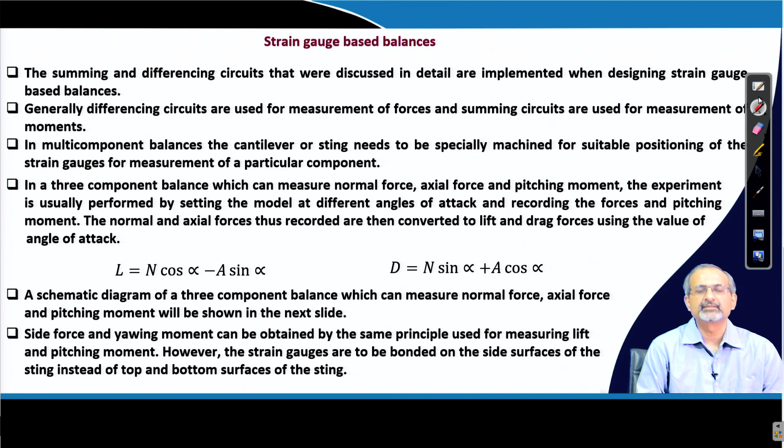We already learned quite a bit about the strain gauge based balances, in the sense that we looked at summing circuits, differencing circuits, and we also looked at how measurement of moment is better done with a summing circuit and measurement of force is better done with a differencing circuit. So keeping all that in mind, we continue discussing strain gauge based balances.

This is what I already discussed, and we move on to the third point straight away: in multi component balances, the cantilever or sting needs to be specially machined for suitable positioning of the strain gauges for measurement of a particular component. For example, if we take a 3 component balance which can measure normal force, axial force and pitching moment, the experiment is usually performed by setting the model at different angles of attack and recording the forces and the pitching moment.

So you will be getting those in the body axis system. The normal and axial forces which would then be recorded have to be converted to lift and drag forces, and for that what you need to know is the angle of attack. So once you apply the angle of attack, you can easily obtain the lift and drag forces from your normal and axial forces that you have measured.

We will of course look at a schematic diagram of a 3 component balance in the next slide. If you are interested to go for a still higher number of components in a balance, let us say you are interested further to measure side force and yawing moment, for example, then the very same principle gets extended.

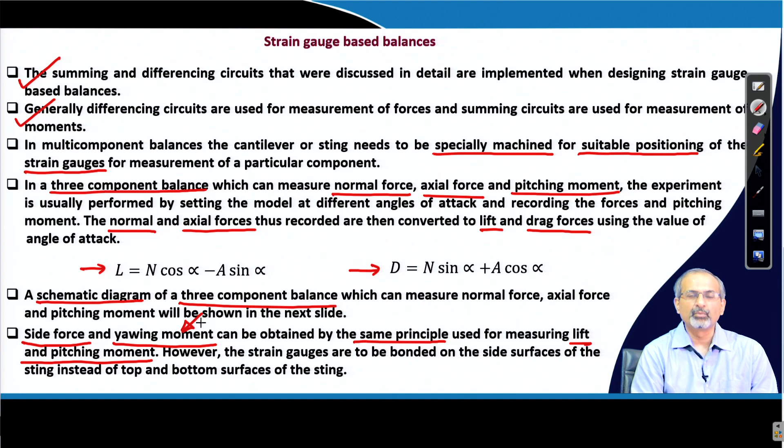Whatever principle you are using for measuring lift and pitching moment gets extended for side force and yawing moment measurement. Only thing is that the strain gauges are to be bonded on the side surfaces of the sting instead of top and bottom surfaces of the sting.

For example, if we try to draw a very simple representation this way, this is your sting which is more like a cantilever beam, though we are not showing the support here, which will be here somewhere.

Now we were talking about placing strain gauges on the top and the bottom surfaces for obtaining the lift and pitching moment, for example.

However, if you are interested in obtaining the side force and the yawing moment, you would be utilizing this side surface and the one which is opposite to it, but is not visible in this view, because that is the direction in which the sting balance will get deformed under the action of a side force and yawing moment. So we are basically changing the plane in which the deformation or the strain occurs, and therefore the mounting of the strain gauges have to be on the side surfaces instead of the top and bottom surfaces.

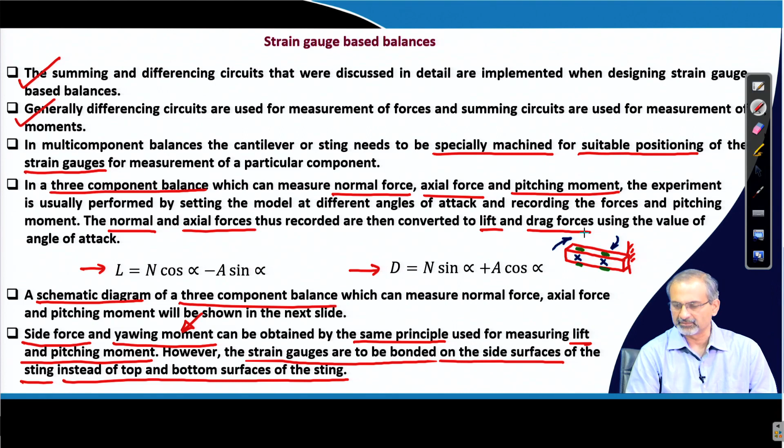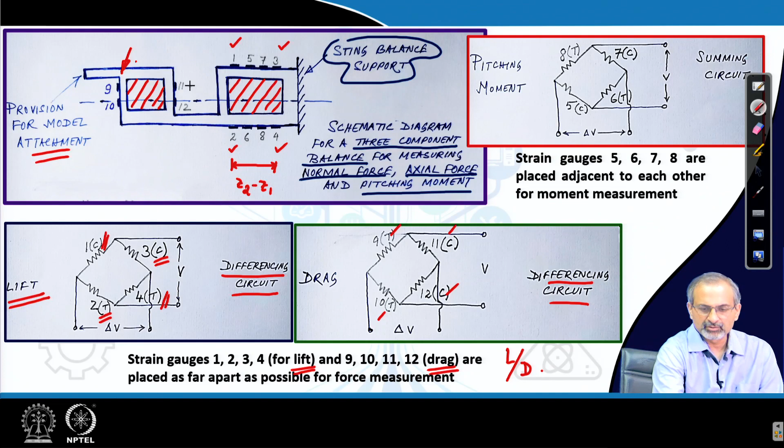And then again you apply the differencing circuit, in that case too. So you have tension, compression on opposite sides, and not only that, you also try to maximize the distance between them as far as possible.

Going to pitching moment, you have resistances 5, 6, 7, 8, which are much closer to each other compared to the differencing circuits. This is where you see the difference. They are kept much closer as far as you can approximate them, and then they are put in a summing circuit, in the sense that compression opposite to compression, tension opposite to tension, that gives you the summing circuit. And therefore...

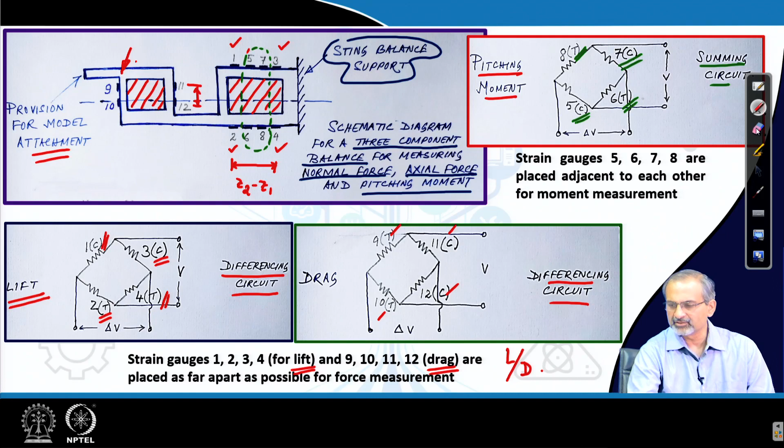You have to design appropriate sections, mount the strain gauges appropriately with appropriate distances between each other, and then connect them appropriately in Wheatstone bridge configurations, so that you are able to get either forces or moments out of them. So, this 3 component balance configuration gives us some idea in that regard.

Let us look a little further. Let us say if you are interested in measurement of rolling moment. Earlier we were talking about measurement of side force and yawing moment, and we found that it was somewhat similar to measurement of lift and pitching moment. Only thing is, mounting of the strain gauges have to be on side surfaces instead of top and bottom surfaces. But what about rolling moment?

Here the section is usually differently designed. Let us imagine that the main sting body is circular. If it is that way, then it is machined in a form like this in one part of it, where the strain gauges related to the rolling moment measurement are to be bonded onto the sting balance surface. So, we find that some kind of a section like this is machined, and on the 4 surfaces, 4 strain gauges are mounted. Remember that when there is a rolling moment, it will tend to move like this or like this, and a section of this kind will be much better sensitive in trying to record the rolling moment. Therefore, the sections have to be appropriately designed to make them sensitive for measurement of a particular force or a particular moment. This gives us a good example of that.

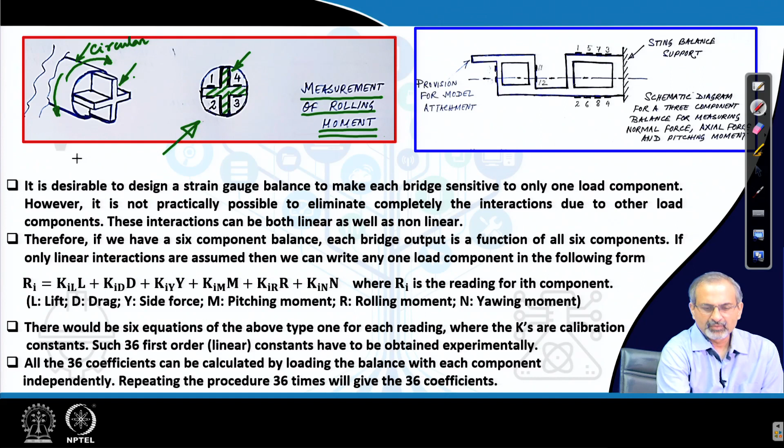Beyond all this, there is also the problem of cross coupling between the different load components or interactions. So, what is meant by that? Let us try to discuss that.

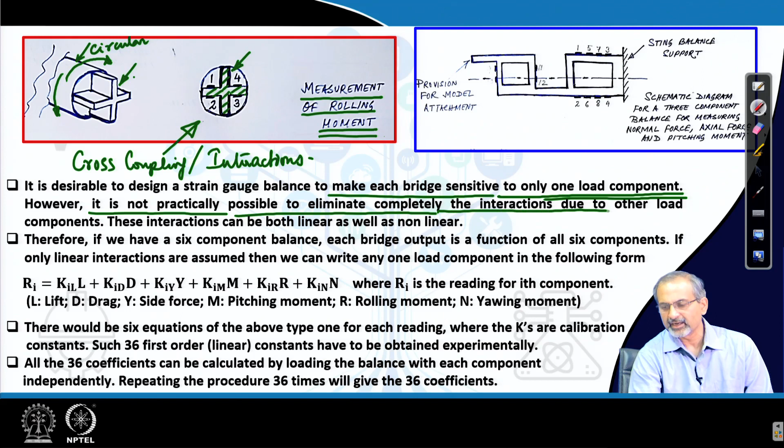It is desirable to design a strain gauge balance to make each bridge sensitive to only one load component. Let us say the bridge which is measuring the normal force only measures normal force, it does not respond to any other force application. However, it is not practically possible to eliminate completely the interactions due to other load components. This is a fact of life, and these interactions can be both linear as well as non-linear. Modeling them as linear is somewhat easier, modeling them as non-linear interactions is further more complicated. But again, the real world most often shows up non-linear behavior to quite an extent.

Therefore, the different loadings tend to get coupled when it comes to the measurements. This we have discussed to some extent when we were also talking about mechanical balance, if you recall from an earlier lecture.

Well, then in the present context of electronic balance, if you have a 6 component balance, each bridge output is a function of all 6 components, 3 forces and 3 moments. Let us for simplicity consider only linear interactions. If we do so, then we can write any one load component in the following form. We have shown a formula here for indicating the way we should represent it. This is the formula.

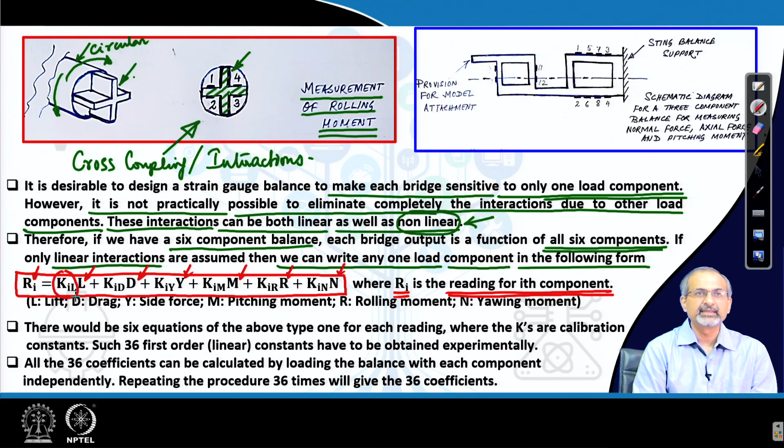What do those terms mean? First of all, Ri is basically a reading of the ith component. That ith component may be lift, drag, side force, pitching moment, rolling moment or yawing moment, any one of them. So, the different forces are written, the different moments are written, and they are accompanied by coefficients. The coefficient has an index; i is coming from this index and the other part of the index corresponds to the particular force or moment that we are referring to and associating it with. Note the nomenclature here.

If you vary i from 1 to 6, so that all the 6 components are covered, then you will actually have 6 such equations for each of the 6 readings, where what are those k's? Those k's are nothing but calibration constants.

So, 6 equations each containing 6 calibration constants makes it 36 first order or linear calibration constants, and we do not know them initially. Therefore, they have to be obtained experimentally. This is what makes life very difficult for an experimentalist, but this has to be done very systematically, without which the balance is not usable.

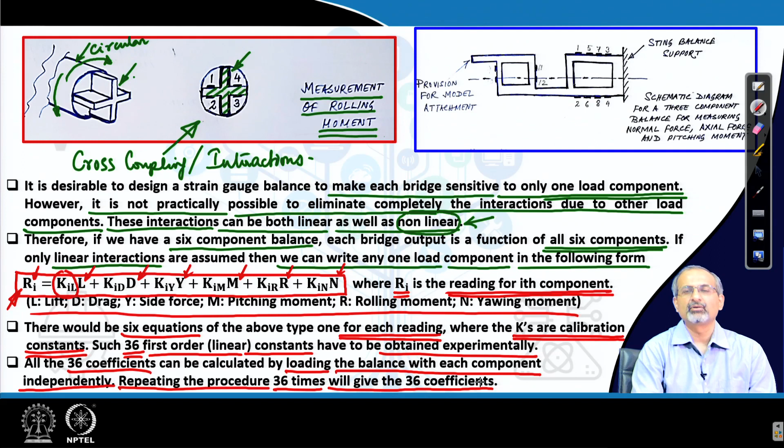So, all the 36 coefficients can be calculated by loading the balance with each component independently, and then repeating the procedure 36 times to get the 36 coefficients. There is no easy way out. You have to do it and fill up this information before the balance becomes usable. Once you are done with it, you know the values of all these coefficients, and they would be plugged in to interpret your meter reading or display reading in terms of the load that you are measuring.

So, with that we end our discussion on balances. Now, we move on to a discussion on pressure measurement using electronic systems.

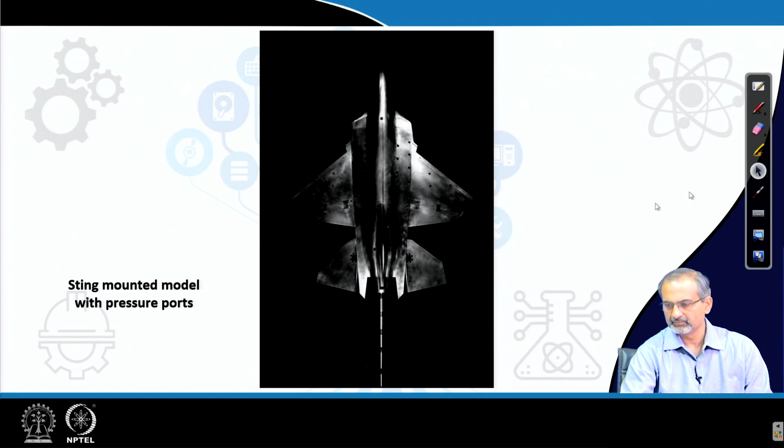Let us briefly introduce electronic pressure gauges, the main points. When we talk about electronic pressure gauges, we are basically talking about pressure transducers, and they can measure a wide range of pressures with very good response in general. We discussed how they are superior to their mechanical counterparts in terms of response time, measuring very high or very low values, and their ability to capture transients and unsteady pressure with very high frequency. These are advantages which you cannot achieve using a mechanical pressure sensing system based on pitot tubes or pressure ports coupled with manometers.

When you talk about very low or very high pressures, that means you are able to cover a wide range of pressures depending on your need, and accordingly the pressure transducer is designed for the range it is supposed to be operational for. The range that we have available is broadly 10 raised to power minus 4 to 10 raised to power 5 psi. Now, psi basically stands for pounds per square inch, and if you do the unit conversions, you will find that 1 atm is approximately equal to 14.3 psi.

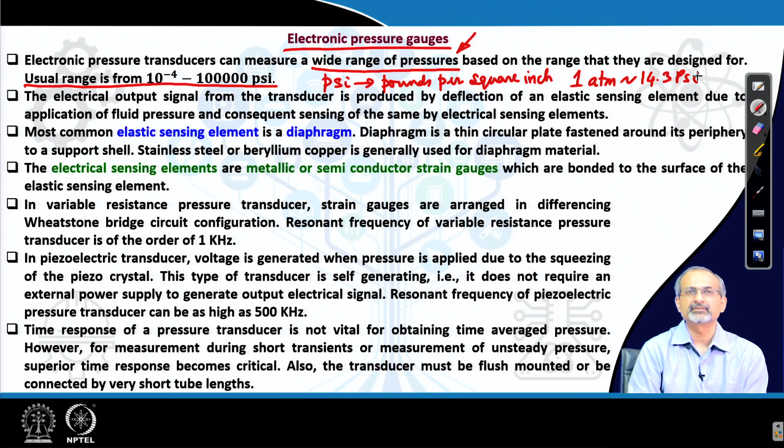So, you are encouraged to do the conversion yourself at home and check for yourselves. You are now familiar with different units of measuring pressure: bar, atm, Pascal, which is the same as Newton per meter square, pounds per square inch, etc.

The electrical output signal from the transducer is produced by deflection of an elastic sensing element due to application of fluid pressure, and consequent sensing of that deflection by an electrical sensing element or elements. That means pressure causes a deflection in an elastic sensing element, and that is converted into an electrical signal or current using electrical sensing elements. The strategy remains exactly the same as what we discussed in the case of electronic balances, but the configuration is different.

So, let us see configurationally what is the difference between what we have seen in a balance, where we used a cantilever beam like setup, which we call the sting balance, and what we are calling a pressure transducer. In pressure transducers, most often the elastic sensing element is a diaphragm. We are no longer talking about a sting or cantilever beam, but a very thin diaphragm which can respond to pressure changes. It is usually a thin circular plate fastened around its periphery to a support shell. Usually stainless steel or beryllium copper is used for the diaphragm material.

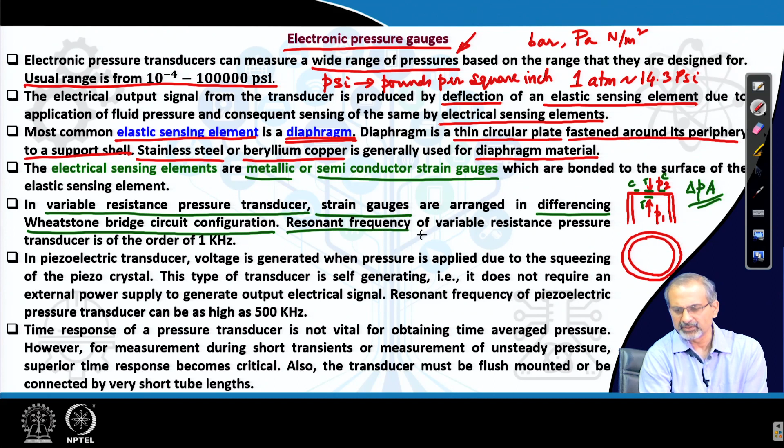The electrical sensing elements are metallic or semiconductor strain gauges as usual, which are bonded to the surface of the elastic sensing element. Variable resistance pressure transducers use strain gauges, which we already discussed, comprising differencing Wheatstone bridge circuit configurations. Their resonant frequency is of the order of 1 kilohertz.

There is another category called piezoelectric transducer, where voltage is generated when pressure is applied due to the squeezing of the piezo crystal. That means the applied pressure squeezes the crystal, and that helps generate a voltage. Therefore, these kinds of transducers are self generating, meaning you do not need an excitation voltage for them to respond and give an output voltage. They can generate their own voltage based on the applied pressure. Therefore, the output electrical signal comes on its own.

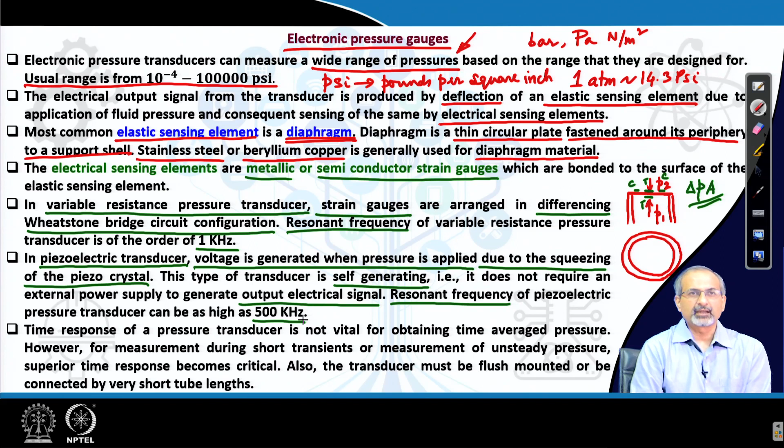They are very high in terms of resonant frequency, which can go up to 500 kilohertz or even more in the megahertz level. The time response of a pressure transducer is not vital for obtaining time average pressure. However, for measurement during short transients or measurement of unsteady pressure, superior time response is absolutely critical.

Also, when you are looking for high time response or superior time response, the transducer must be flush mounted or connected by very short tube lengths. That means, at the point where you are recording pressure, the transducer needs to be absolutely flush mounted to that point or very close to it, but certainly not at a far off point connected using a pressure tubing. That is a very faulty way of measuring time dependent pressure.

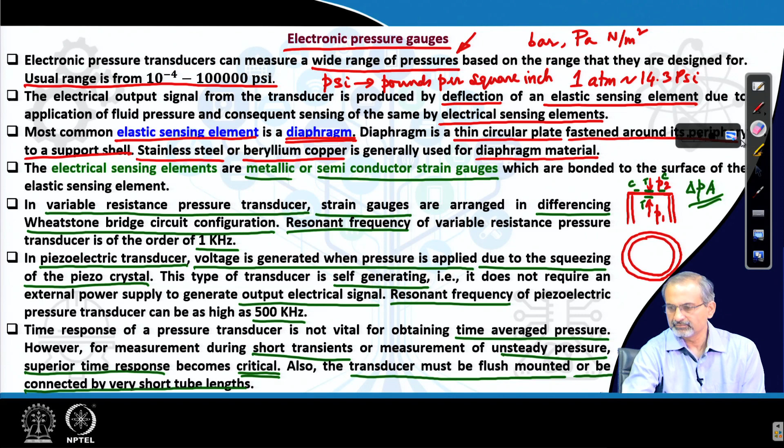Let us look at a very interesting configuration which has remained in service for long in this electronic pressure measurement world, which is basically the concept of pressure scanner. These days piezoresistive transducers have become much cheaper and more affordable, but there was a time when they were extremely expensive. So at that time the strategy was to use a single pressure transducer to measure pressure from many ports of a model mounted in the wind tunnel. This was possible through a pressure scanning or pressure scanner system, primarily as a constraint due to the expense.

During this period, pneumatic scanning valves called Scanivalve were produced, and they were very popular for a long period of about 40-50 years. In a Scanivalve setup, a single transducer of excellent quality was connected or interfaced with each of the model pressure ports sequentially. That means one port at a time is interfaced or connected with a single transducer of very high quality. If we look at the sketch here, that is what it is talking about.

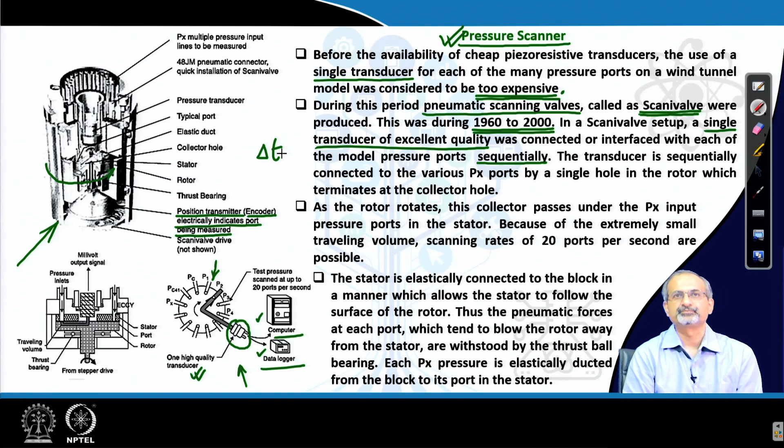Let us say you have 100 ports on the model; then in a given time you would move from port 1 to port 2 to port 3, complete up to 100, and then again come back to port 1, and over a short duration delta t you try to record the pressure coming from each port through that pressure transducer. So the transducer is sequentially connected to the various PX ports by a single hole in the rotor which terminates at the collector hole. There are design related details being mentioned here, but the basic idea we already talked about. As the rotor rotates, this collector passes under the PX input pressure ports in the stator. Because of the extremely small travelling volume, scanning rates of 20 ports per second are possible.

The stator is elastically connected to the block in a manner which allows the stator to follow the surface of the rotor. Thus, the pneumatic forces at each port which tend to blow the rotor away from the stator are withstood by the thrust ball bearing. Each pressure is elastically ducted from the block to its port in the stator.

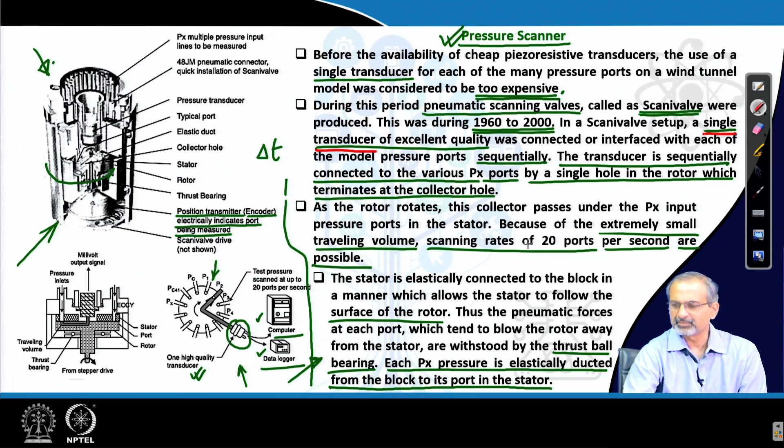So these are more details about the actual configuration, which you can see from this picture, and you will understand better if you go through this part. But the most important part is to understand that we do have only a single transducer in this setup, and we have to measure pressure from many points of the model, and the pressure scanner enables us to do that. In later times, piezoresistive transducers became much more affordable, and then large numbers of pressure transducers were packed within compact pressure transducer setups, and now you can have one transducer measuring from one port only at a time.

This is another schematic diagram of the electronic pressure scanning system we were talking about. This is the Scanivalve configuration. You can see that 8 ports are actually there in the model shown here, and at this point port 2 is being read by the pressure transducer.

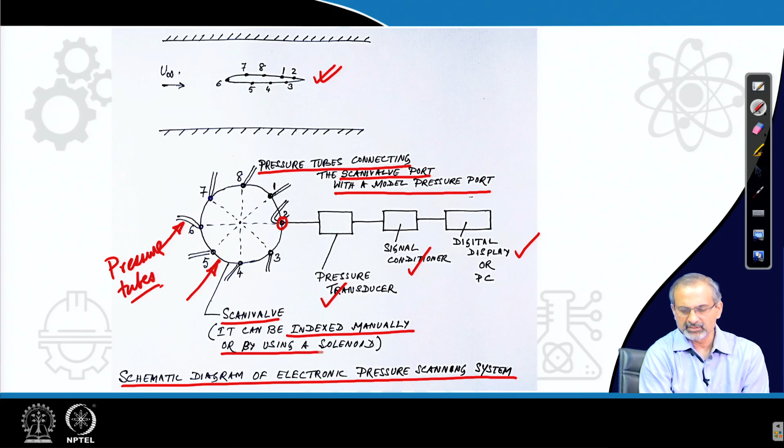It is interfaced with a signal conditioner and further with the digital display or PC, and the pressure tubes connect the Scanivalve port with a model pressure port. So these ports and the pressure tubings are schematically shown, and this Scanivalve can be indexed manually. That means you can rotate it from one port to the other manually or by using a solenoid control system.

Moving on to more modern systems, as I said you can actually have them in much more compact setups, and these compact setups can contain 64 transducers within a small volume like this, more like a rectangular biscuit. The highest length is of the order of 10-11 centimeters, and then 4 centimeters and 1.5 centimeters along the other two directions.

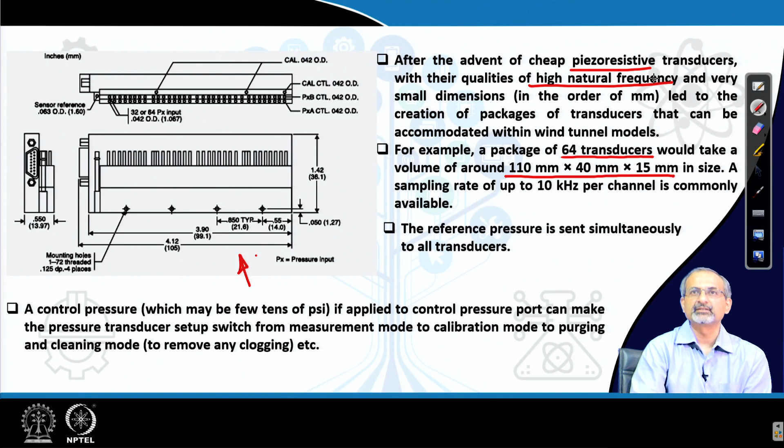And that is because piezoresistive transducers have become much cheaper these days. They have very high natural frequency, the data acquisition rates are much higher, they have very small dimensions, and therefore they can be packed into and accommodated within wind tunnel models. That means you can have a fully instrumented model with the pressure transducer sitting inside the model itself.

So it has become that compact, and as you understood, when you are trying to make unsteady pressure measurements, the transducers need to be extremely close to the measurement point. So having an instrumented model with these pressure transducers located within the model is very advantageous.

The reference pressure is sent simultaneously to all transducers. So there is a reference pressure port which may be either open to atmosphere, or it can be fed with some constant pressure source, or it may be connected with the wall pressure port of the wind tunnel. So there needs to be a reference pressure which can be simultaneously provided to all the transducers that you have in the setup.

A large number of metallic tubings are coming out of the setup, so that you can figure out that there are pressure transducers inside which are interfaced with those, and therefore a large number of pressure transducers are actually located here within.

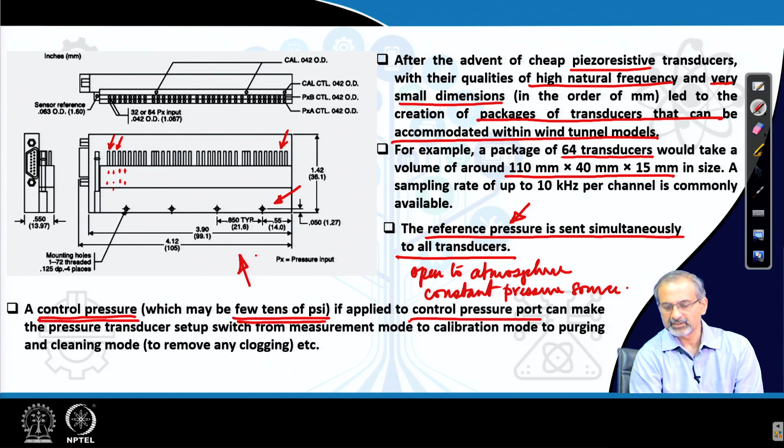Very often in these systems, a control pressure is additionally required, which may be in the order of a few tens of psi's or a few atmospheres basically, and it has to be applied to a control pressure port, so that you can operate the pressure transducer setup in different modes. It can be a measurement mode where you are recording data from a model, or you are freshly calibrating the transducers, or you are purging and cleaning the transducers to remove clogging. So there are different features which have now been included.

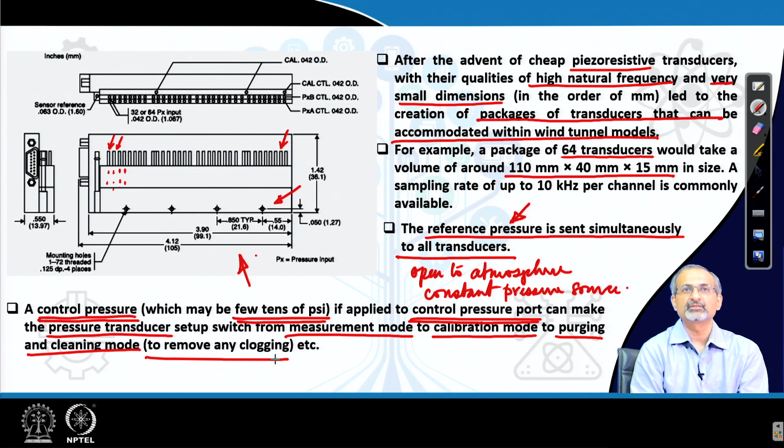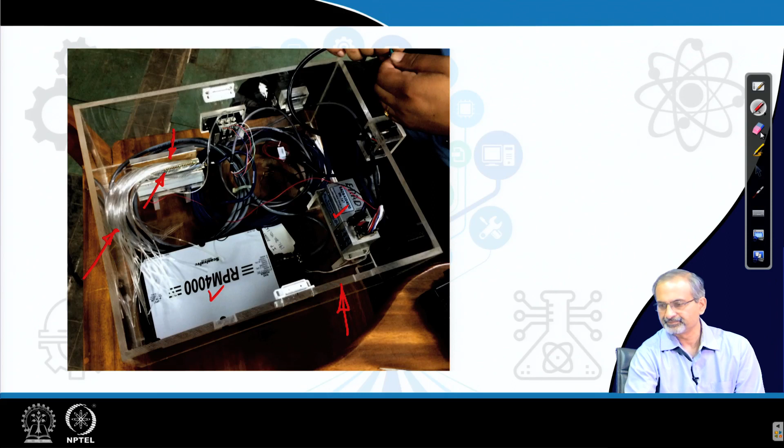So in this lecture we discussed strain gauge balances in the beginning. The placement of strain gauges on the balance and coupling or interaction effects were discussed. Subsequently, electronic pressure gauges were discussed. The concept of a pressure scanner to interface a single pressure transducer with multiple model pressure ports was discussed - that is basically the Scanivalve model. Further, more modern units with multiple pressure transducers, each connected to a specific model pressure port and housed within a single system, were also discussed. Thank you.